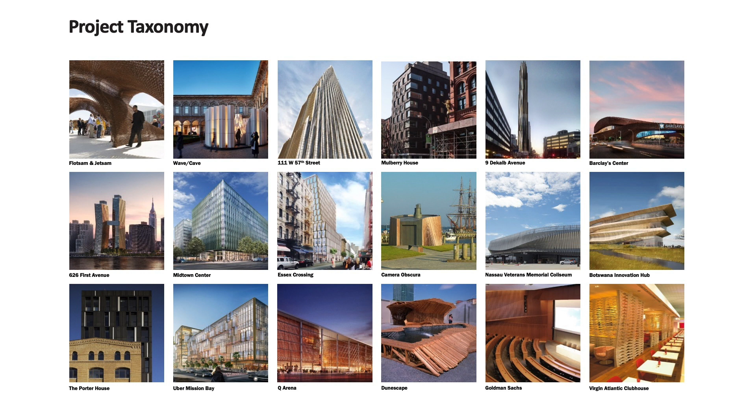But this is a process presentation. If you look closely at all of our buildings, there is an embedded R&D element in terms of material, in terms of delivery. And really, the firm itself is very much about understanding complexity, the design complexity, and the delivery of that, what it means to take elements and pieces and components and describe that to the parties involved in the manufacturing or delivery of the building.

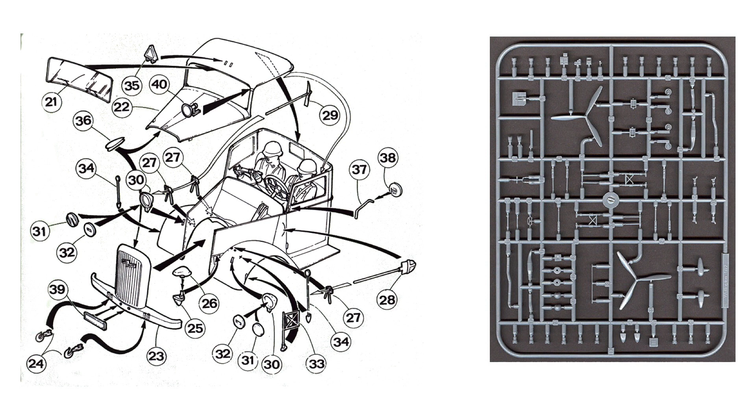And just as you would build models growing up, you never read any instructions. That's the sort of IKEA approach. Piece 32 snaps into piece 31. And industrial design certainly works at the idea of a piece and a part and a sub-assembly, and automotive and aerospace, of course. We do believe that you can manufacture buildings. Great design, great environments, but they can be delivered through a manufactured approach.

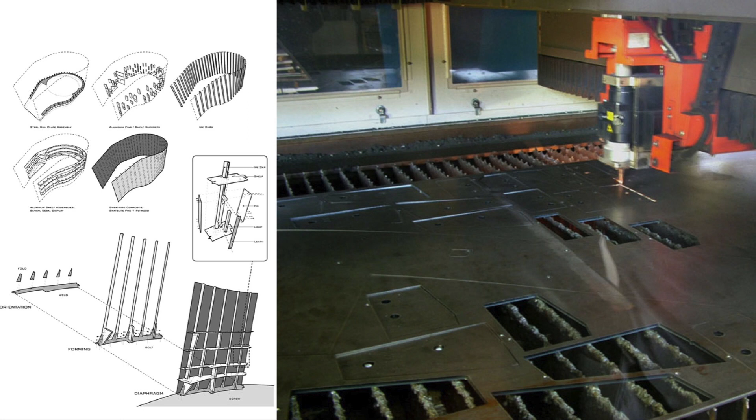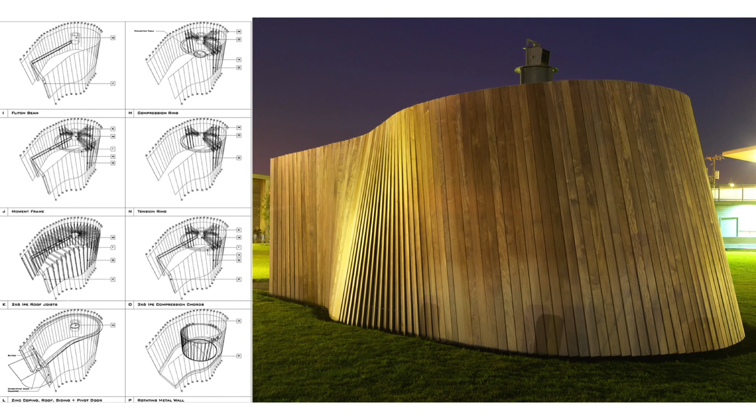What it requires is an intimate understanding of, of course, your design and delivery, the machines and methods, the people you're communicating with. But when you synthesize all of that and design that in parallel, the modes of communication change. The plan, section, elevation are not the most communicative and effective way to deliver.

That was a very old project, camera obscura. As we've moved through, we continue to develop methods of communication, whether it's virtual reality, augmented reality, but this model-based approach that the truth really is in the design environment. It's a three-dimensional environment. And we like to know the pieces and parts in our buildings, whether we're involved in fabrication or not.

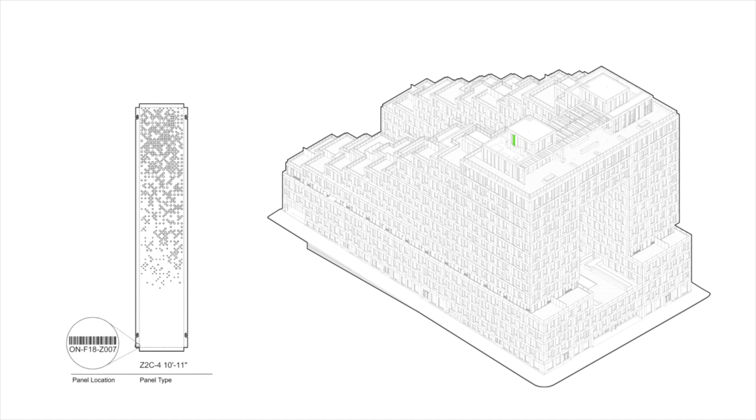When we say that there are 75 different panel types, we mean they're 75. They're not stretched, they're not mirrored, and there is a nomenclature. We don't know what the manufacturer will call an individual piece, but it is important to understand that they will call it something, and if we build those systems in the design process, we can streamline the translation into manufacturing. We have found that to exercise the way we want to, we have had to move out of the AEC toolkit. We've had to expand into software and platforms that are not the traditional architectural design realm.

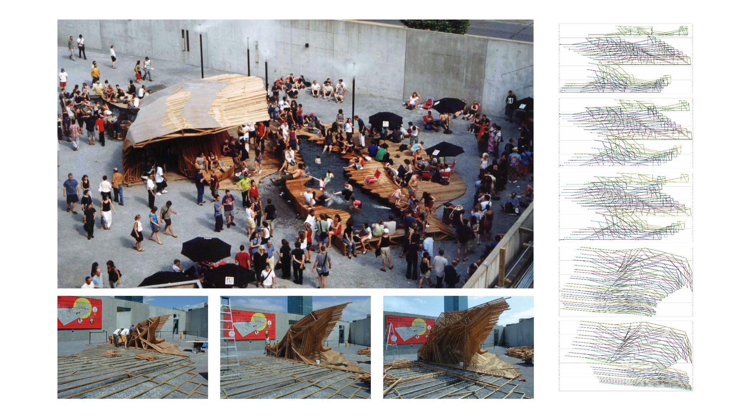So we do leverage aerospace software, and really, this DNA came from the first project, PS1 Pavilion. This is when computers were hitting design studio, and it was very much about making form. The SHoP approach was that computers are a tool for delivery. The only drawing, construction document, is a one-to-one plotter scale. All of the profiles plotted at one-to-one and nailed in sections and then erected one slice at a time. That's the only tool needed.

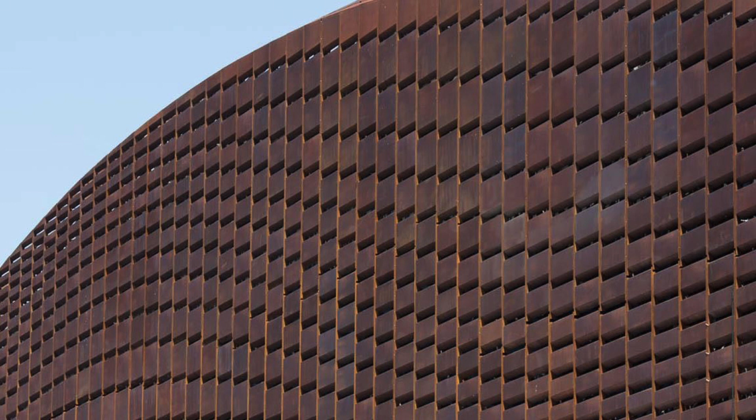And a decade later, if you take that mentality, our process and tools become exponentially more sophisticated, and we're able to handle orders of magnitude more complex delivery mechanisms. So the Barclays Center is our largest proof of concept at prototype scale, where every piece and part is modeled. All the manufacturing deliverables are embedded in templates. There are 950 different mega panels. This is a prefab system. It's built off-site, manufactured off-site, installed in the building.

But the design criteria, the model itself, contains all the information, and every design iteration contained all the unrolled panels, which, as the systems develop, as we get information from engineering and from manufacturers, we're able to address long lead items. How do you order 600 tons of steel while you're in a design process? You have to control all the variables and synthesize design and manufacturing.

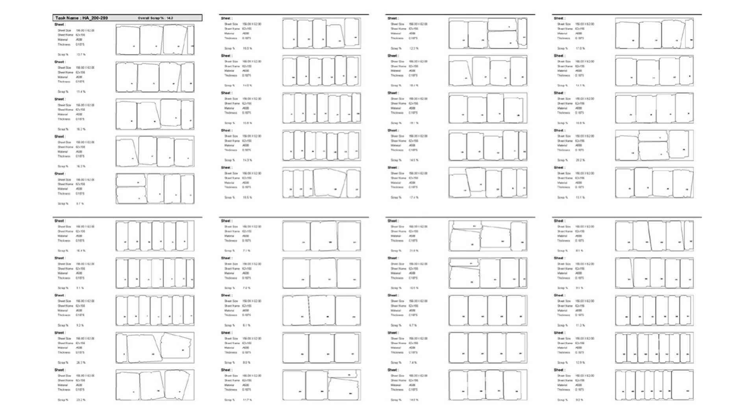And to the point, we're able to automate a lot of the fabrication tickets, but the idea of a templated approach, which you'll see in a minute, is that you divert or reappropriate energy in building smart systems up front that can be applied instead of having armies of CAD and drafts people.

And the takeaway from that is that it's not about geometry. We can solve the geometry and the CNC and all of that. The challenge becomes logistics. How do you keep track of hundreds of thousands of unique parts? Because the machine doesn't care whether it cuts 12,000 individual parts or the same part, but you have to track them.

So we have our database, and what we realized was low-hanging fruit is we can host a model online. Everyone can log in, and we created that iPhone interface so that you can scan along the factory floor, update, and the process is visualized in real time. There's not monthly reports or weekly reports.

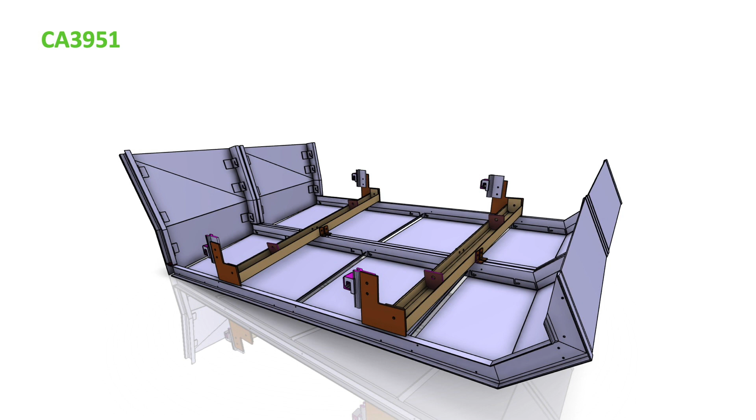Yeah, I mean, Barclays certainly, as a prefab exercise, was in very many ways an experiment. We did not go into that with a defined scope of how it would be delivered, but it was facilitated through these digital tools. And if you look at one individual unit of the 950 different ones, we did it on a traditional file-based program.

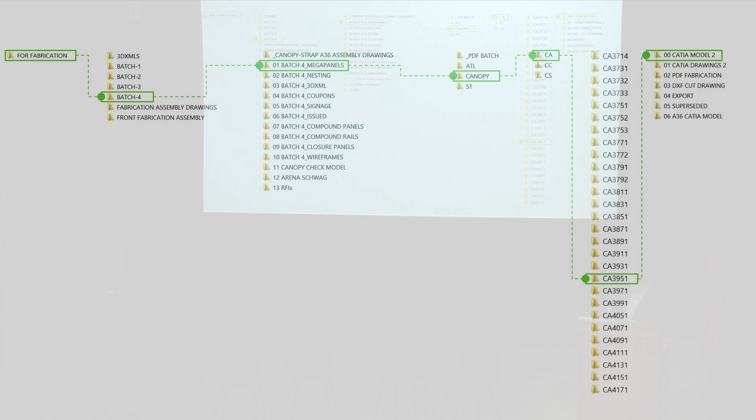So we're modeling, and you have to keep track. If a piece and part, you have to trace it through your Windows Explorer structure. If you need information on something, you have to have this very logical ordering system. We've since moved to a cloud-based platform where the information is accessible. Everything that has to do with that unit is available instantly, is retrievable immediately, and this access to information is exponentially faster, which leads to decision making, right?

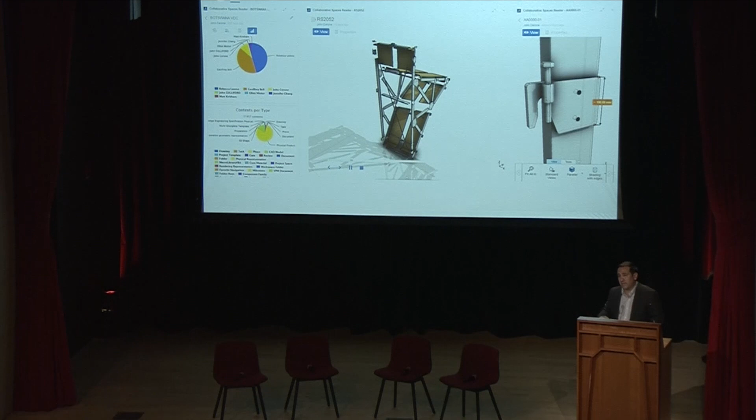The information itself is not limited now to heavy software platforms. It's all in the cloud. So instant access to the data and metrics, how many pieces, parts, who's made them, web viewers, so that we can work overseas in federation with our collaborators. The project itself actually is the modeling environment, and that is a unique shift. It was quite profound to us when we realized that we're not thinking of a project as a building. We have a portfolio of projects in a platform.

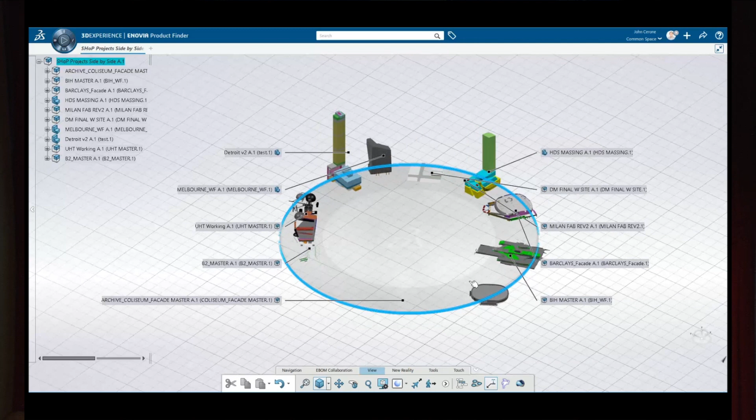Pieces and parts can start to relate to each other across, to the building scale, to the individual bar of a building, to the block, to the trade, to the facade components, down to the individual unitized system, down to the bespoke bracket and piece and part. This ability to move seamlessly through all the scales of the building in real time had a profound impact on how we understand our design process.

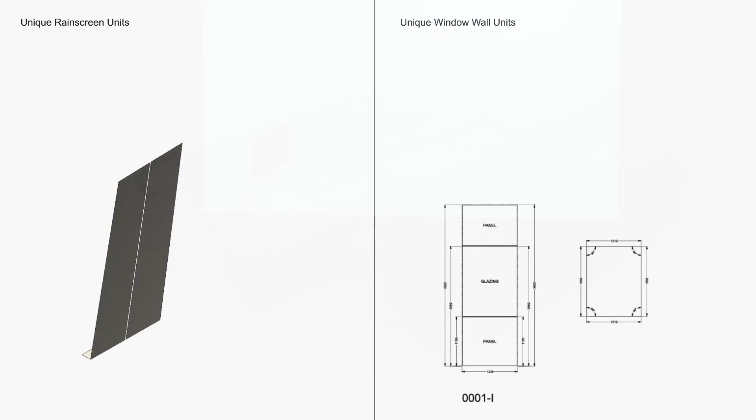So Botswana Innovation Hub is something that's near completion, and in many ways it's an order of magnitude more complex, an evolution from Barclays, in the sense that we know where to start. You have to analyze it. We need to know how many different pieces, parts, right? So you automate the analysis of your design, and then it's very much the idea of a skeleton model. Parametric modeling is not a novel thing anymore in design schools. So it's the idea of these lightweight frameworks, but that we can then use those to host complex geometry.

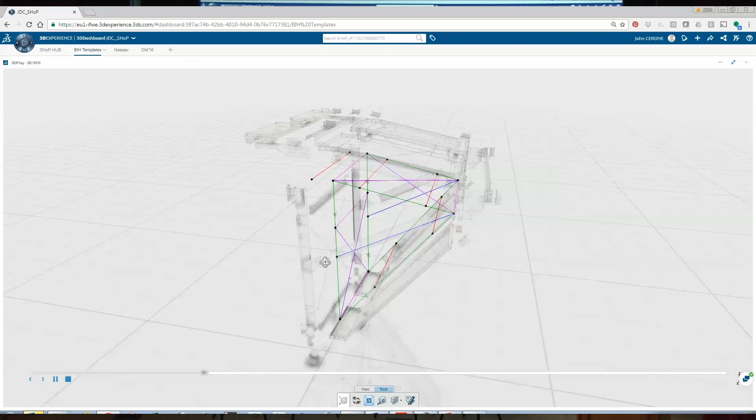That is where the paradigm starts to shift, where you build these 8 templates that account for probably 520 different units. So they're all bespoke units, but you're building the template up front. It's a very simple wireframe, and as you get information from engineering, from the manufacturers, constraints on materiality, you host parametric systems on those pieces, parts, and you instantiate those unique templates.

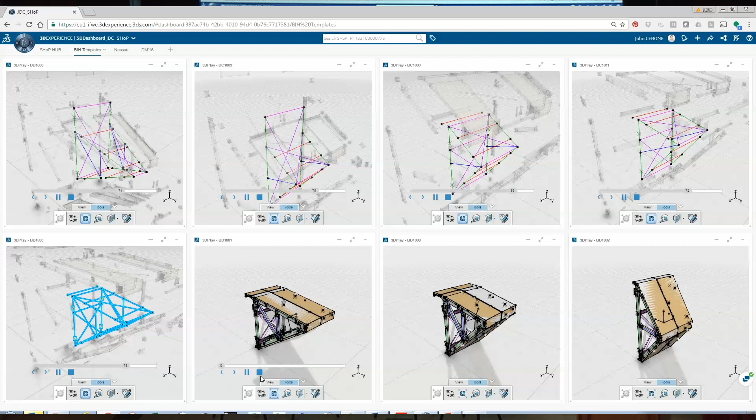So you spend a lot of time up front building a template that has all of the information, all the fabrication deliverables, everything needed to produce it, and then you automate the production of thousands of units. And of course, our systems for tracking, online databasing, we've built our own tools in-house to facilitate that.

And this is the information we received from the engineers in Cape Town, South Africa. We asked how far can a member span before you need another connection. And this is not a dig at them. We don't need it on a title block. We don't need line weights. We need to know that it's 2,200 millimeters until the next strut. And from that, this is the only drawing deliverable we gave.

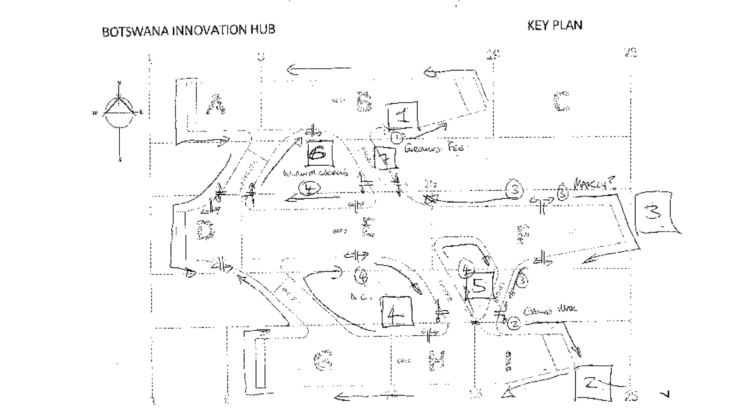So there's 3,000 units. 1,600 of them are unique, and the only drawing for each one is an IKEA assembly drawing with a bill of materials. Likewise, in what order should we deliver these to you? They sent us this drawing. It's 1, start here, go that way. 2, then we'll move here and we'll go this way. It is the only information we need.

We have the CAD, we have the modeling software in terms of schedule performance, and we can simulate quickly with them the iterations of, well, what if we put 2 crews on this? So this idea of creating unnecessary deliverables, that's not good. Of course, 99% of the work we're doing is from our seats in New York, and so we digitize the building, and we don't release anything for fabrication until it's been vetted digitally.

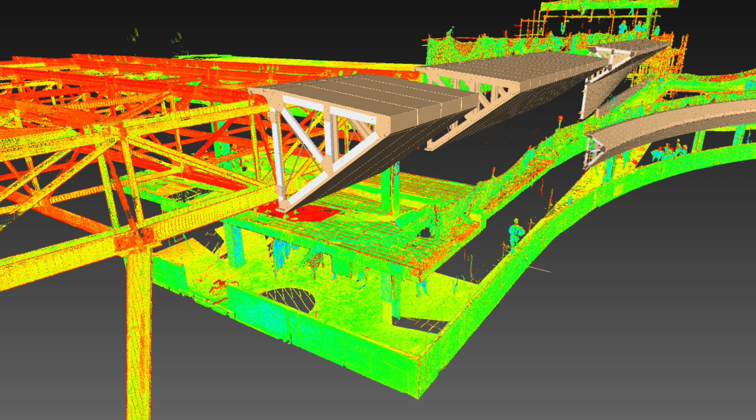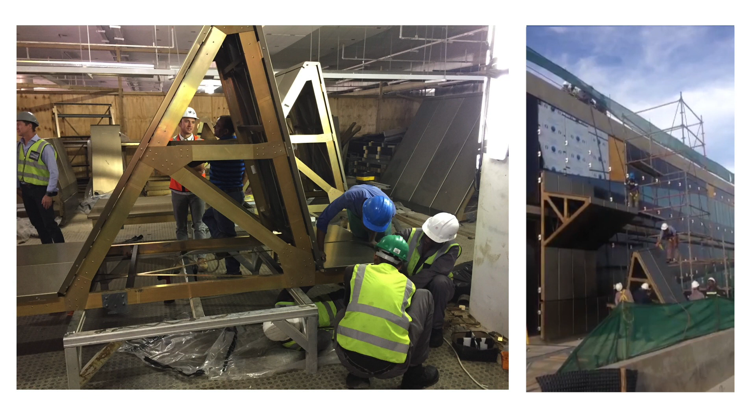And it's very much this. The pieces and parts get fabricated in Cape Town, South Africa, packaged up in IKEA kits, essentially, shipped to Botswana and assembled in the parking garage and installed on the building. We know exactly the methods that they're going to use. We know there's not a crane. We know the weight. We know what's reasonable for people to manipulate. And again, all of that was built into the design systems.

And yeah, it's near completion, and this was done with obviously very low skill labor, but very precise systems, self-jigging. And just quickly, in terms of material practice, we hadn't done a pavilion in 20 years. We hadn't done one since PS1, and it took a decade for that to sort of manifest into Barclays. And in 2016, we did 2 pavilions. We did one in carbon fiber reinforced plastic, ABS, and 3D printed bamboo.

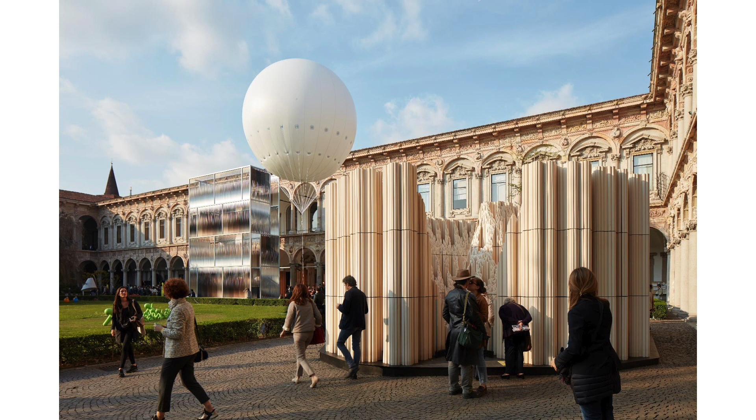So this is an exercise in autonomous form creation. How few parts can you have? It's dictated by the truck bed, how heavy a piece is to pick and lift. So that's sort of advanced material looking, and then we did the most traditional material, or one of the most, terracotta. So what can you do with terracotta? You can control the profile, and then you can cut it.

So these experiments, again, become logistics exercises. How quickly can we set up a system with collaborators that we have great relationships with, understand the tools they're going to use, and execute? Both of these pavilions happened from design to delivery within 3 months. And in this case, a very traditional fabrication deliverable. This is exactly how the people on their shop floor use the miter saw.

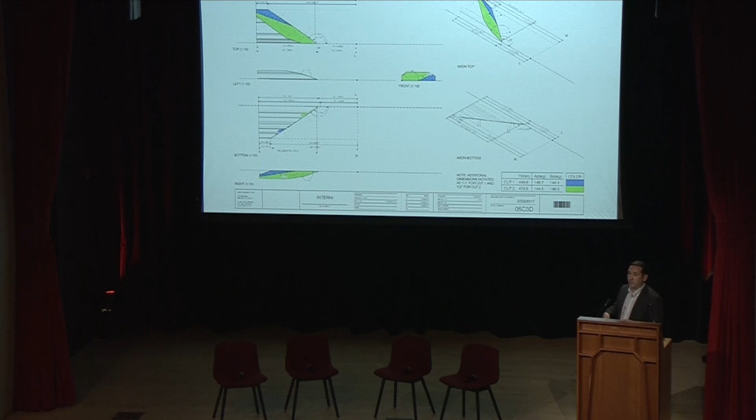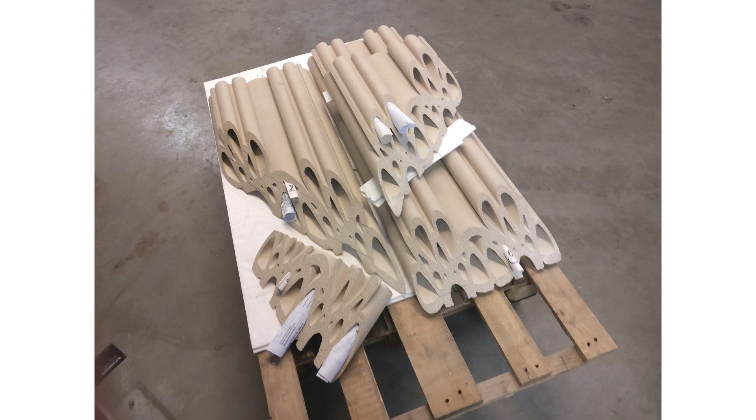These are the cuts they want, so we automate the production of thousands of tiles. This is sort of high tech meets very low tech. And it's kind of this beautiful relationship where the deliverable is tailored exactly to the people or machines making it, and assembled in a week.

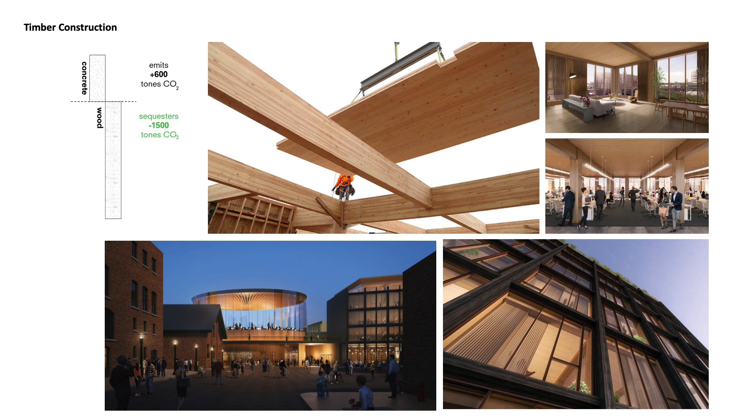And so the reason we do these experiments, we hope it's not another decade. We're already seeing exponential gains in these production technologies. But how do we apply this? How do we manufacture buildings? How do we move this at scale? And of course, CLT timber is a material that we love. We keep going for it. We're finally doing some buildings in it. We had to move out of New York a little bit to do that.

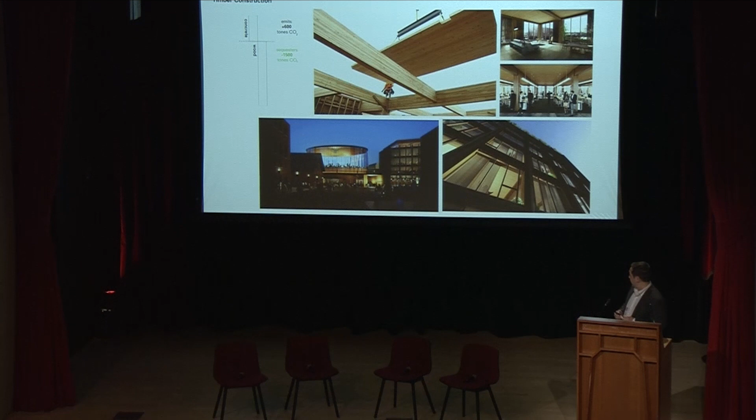But this idea as a manufactured good, besides all of this, obviously, environmental and warmth, it's a beautiful material. It feels great. It's healthy, but it's really a machined good, and it's a material that we know we can move our design models directly into manufacturing. So CLT for sure, and then of course modular construction is of particular interest to us.

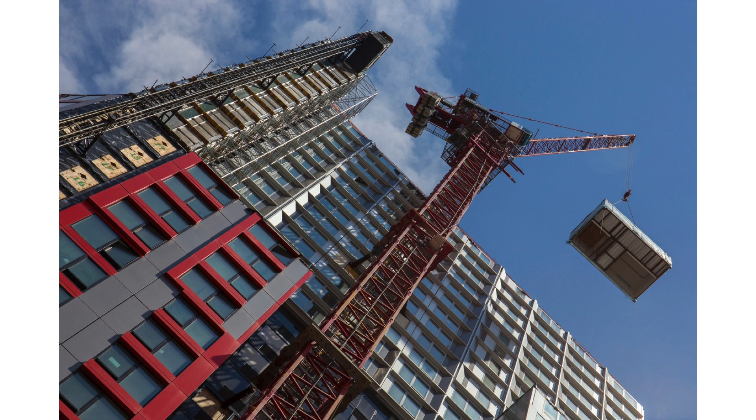It's been a while, but we did the 32-story, we call it B2, Building 2, 461 Dean Street tower in Brooklyn next to Barclays Center. And in many ways, this is a project where it starts with all of the don'ts in modular, which is there should be repetition, don't change the chassis types, try to keep it as regular as possible.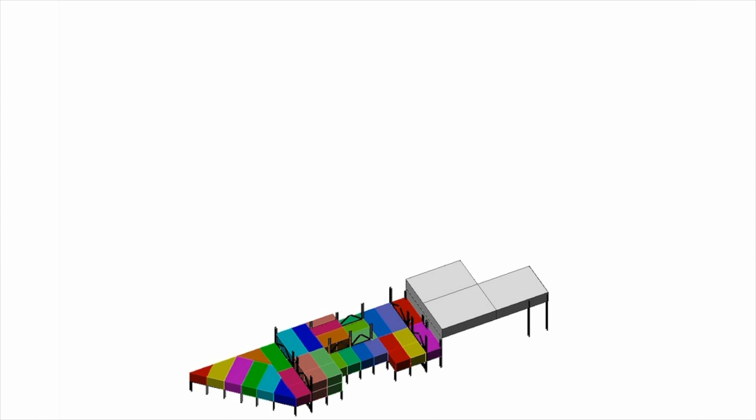So we built the chassis, a fully finished mod with the facade installed. There are, I think, 950 units, chassis in it. I think 350 of them were different, so that is a huge no-no in the world of modular. But, and I'm sure there'll be some questions or follow-up afterwards on any issues with the project, in so many technical ways it's an incredible success that we can't ignore.

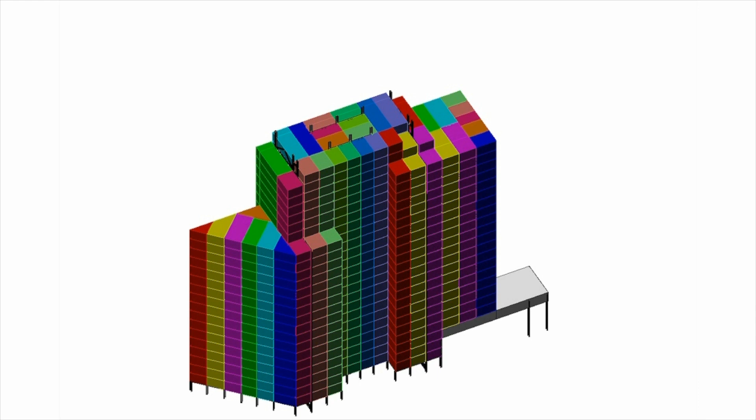The complexity, and in many ways, to start with a building block this challenging has sort of reaffirmed to us that this off-site prefab manufactured approach can deliver incredibly high quality, great affordable architecture, and it is about process and understanding process, and if you can control that and you understand the future ways of building, this is an incredibly promising move towards the future of construction and design.

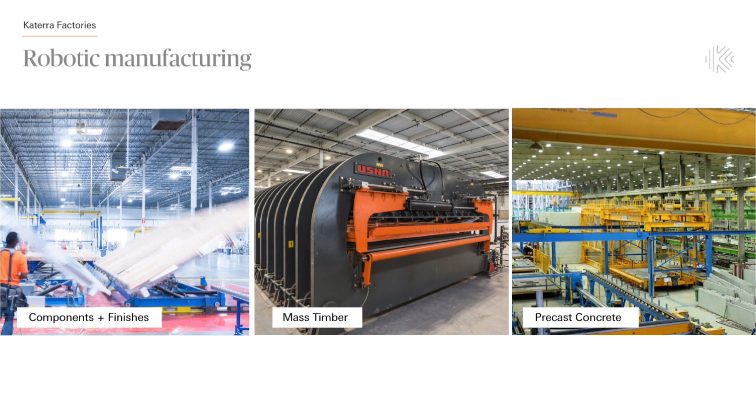So the photograph on the left is where we have a component factory with walls and floor trusses, doors, countertops, windows, things like that. We have two other factories like that, but much more optimized and more automated, that are coming online, one in Texas and one in Tracy, California. And the Tracy, California factory should open in a couple of months. It's about 600,000 square feet, so over twice the size of Phoenix. Texas will be about the same, and then we'll slowly move to the east.

In the middle photograph, you see the press. It's a 12-foot by 60-foot press for our CLT factory in Spokane Valley, and we're just starting to push wood through that factory. In fact, just this week, which is pretty exciting. So our first panels will come out of that press and into our first building in July of this year.

And then precast. It's interesting, through an acquisition in India, kind of an opportunistic acquisition, we ended up in the precast business. And this is the way things are built throughout India and throughout much of Asia. And what's been really surprising is how good they are at precast. I mean, more sophisticated than just about anything you see across America. You have to go to Central Europe and Northern Europe to see facilities that are as advanced as they have in India, of all places.

So it was really surprising that we were able to find a company like that there. They're at the top of their game, and so now we're really building a lot of projects in India and plan to take some of that technology and bring it to the U.S.

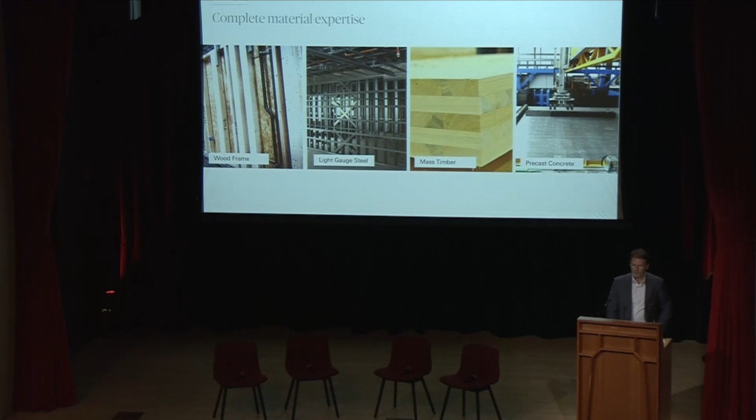So in the multifamily sector, what we're doing also is applying the rules and lessons learned from other industries, for example, the automobile industry. So if you're picking out a variety of packages, interior packages or features in a car as you're shopping for a car, you know for sure that when that car is delivered to you it's going to look great, because every option has been dialed in by the automobile company, and they know that whatever you pick, they can stand behind it. And that just doesn't happen in architecture.

So what we're trying to do is narrow our supply chain to a point where we only have a catalog of materials that we embrace, that have passed the test for sustainability and passed the test for beauty. Then that becomes our catalog, and no matter what combination a client or customer is looking for, we'll be able to assemble that and provide a really high quality product in the end. And if there are some products where we can't find exactly what we're looking for at the right price, then we will design those ourselves.

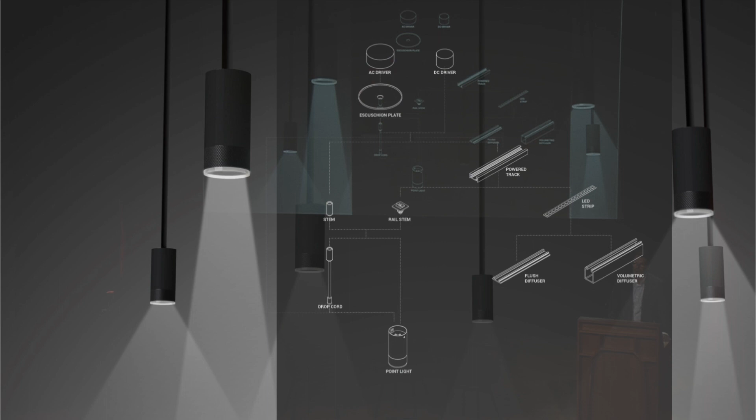So we're designing our own set of plumbing fixtures. We've got an appliance line coming out, light fixtures, door hardware, anything that you really come in contact with as a customer. We want to completely control the aesthetic of that and build all of those systems around the same idea of this kit of parts. So very few parts assembled in different ways to create beautiful architecture.

The result is we want to be able to provide workforce housing. It's that 80 to 120% AMI workforce housing that is largely ignored by the AEC industry, and we want to provide a super high quality product at or below the market costs.

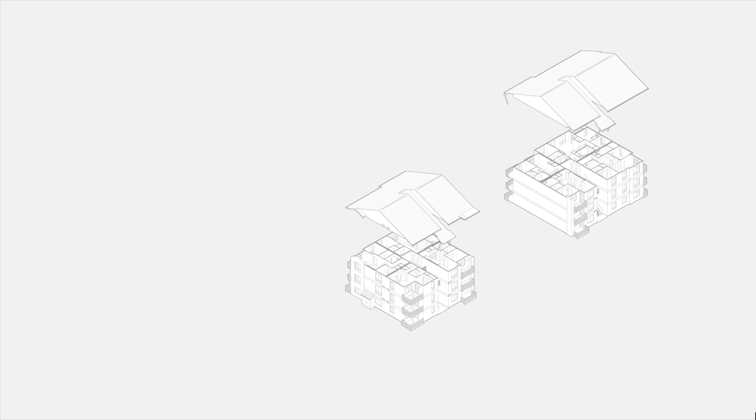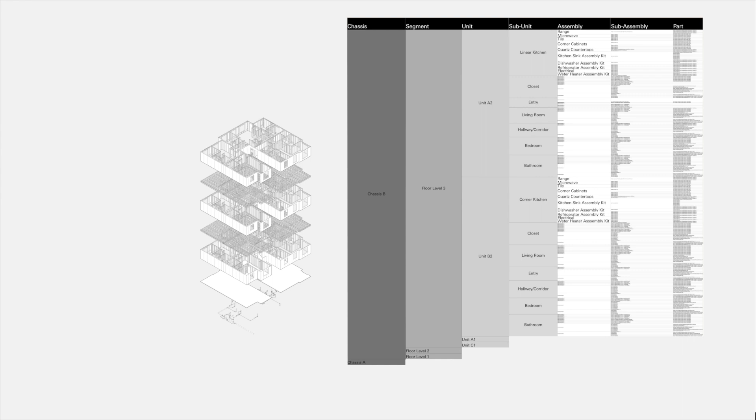So these are some images of some of our market rate housing. And in order to do this in a way that is repeatable but still provides enough variety, this is a little kind of a dumb animation, but just to prove a point of a simple 3-story garden walk-up apartment building. So 15 million people across America live in this type of building, this 3-story walk-up. And again, it's one of these building types that's been woefully neglected by the AEC industry. You don't see a lot of great architecture out there, and we want to change that.

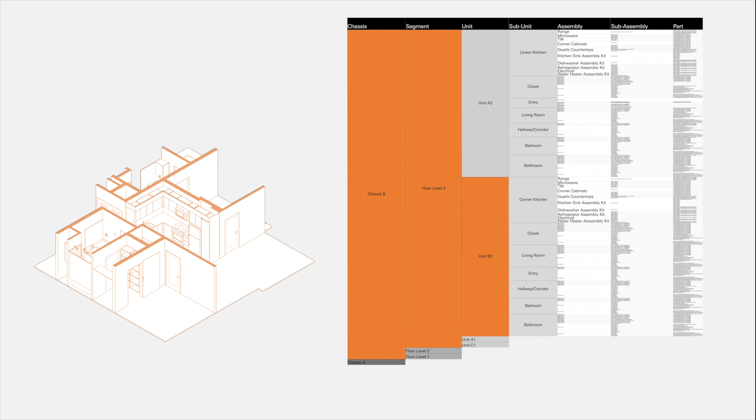But to do it and to have it repeatable, what you saw was 4 chassis that we have available. You can combine those in different ways. You can have different roofs to put on. But when you break it down inside the unit, those kitchens and those baths are exactly the same from one unit to another. And we're detailing that all the way down to the bill of materials, just as John was explaining in more of a bespoke project. We're doing that in a way that can then go into our catalog and become a repeatable product to use over and over again.

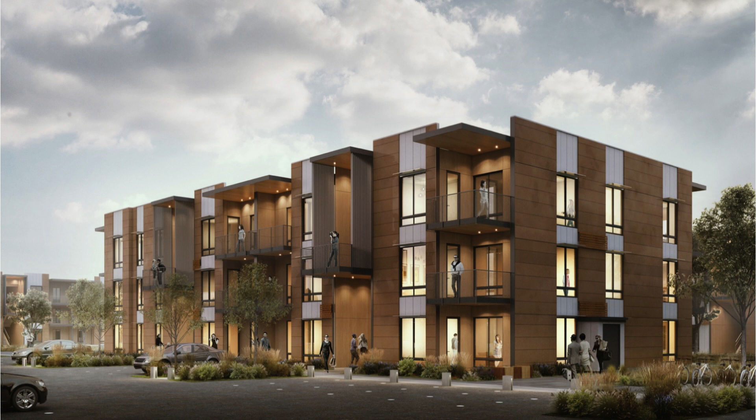What's interesting is you take these 4 chassis, and those are completely dialed to a bill of materials ready to go to the factory floor, but you can skin those in a way that if it's in the Pacific Northwest, you might have an architecture that looks one way, or in the desert Southwest, it would look different. But 90% of those buildings are exactly the same. And then you have a variety of finishes available on the inside. And as we develop this kit of parts, we can then modify that over time in order to look at shifting of blocks and different stories from 1, 2, 3, or 4 stories and so on.

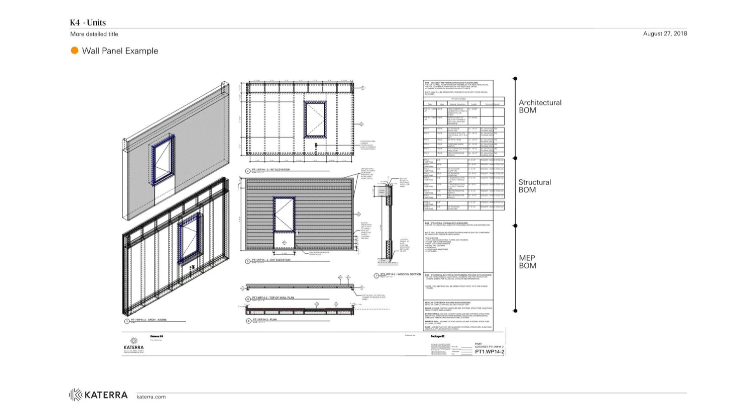This product is the one that I'm most excited about. This is our workforce housing product, and it'll roll out of our factory 3rd quarter of this year. And this is that 80 to 120% AMI target we're looking for. So workforce housing, virtually anywhere in the country with no subsidy, that's our target. And that's one of the main reasons I'm at Katerra. To do that, we're dialing, again, every panel down to the bare minimum that's required. We have 4 different structural tiers and a wide range of environmental tiers across the country, and it's taken down to a bill of materials.

And then I'll end with just a little bit on mass timber, another one of my personal passions and something that I'm really excited about, our investment in Katerra. So we're building a plant right now in Spokane Valley. This is a Michael Green project. Michael Green is now part of Katerra. And we're trying to build a kit of parts around mass timber that's designed specifically for our factory.

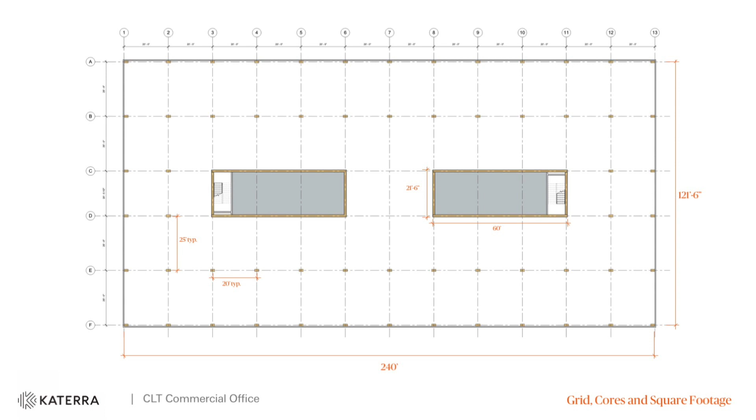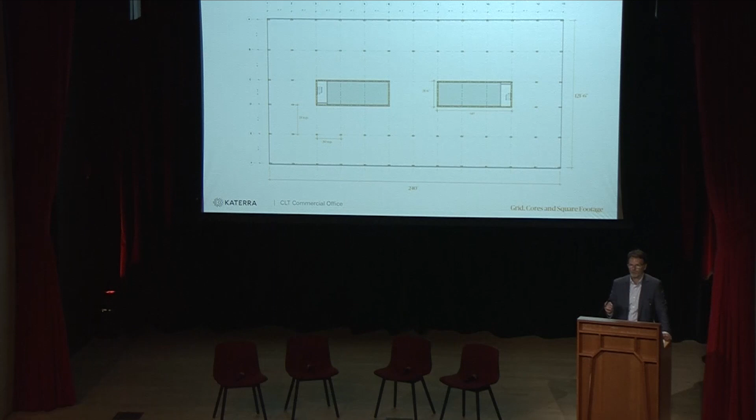So instead of just taking a bespoke project from anyone and trying to fit someone else's geometry to build panels for that, we're looking at how can we build a building system, say for commercial office, that is completely built around our 12-foot by 60-foot press, so that every time we use that press with 2 5-layer panels for floors in it, we're using every square inch of fiber. And that's how we're going to drive the cost of the product down, and that's how we're going to go head-to-head with concrete and steel and be able to put this material across the country, which is super exciting to me. So we're well underway in developing this product.

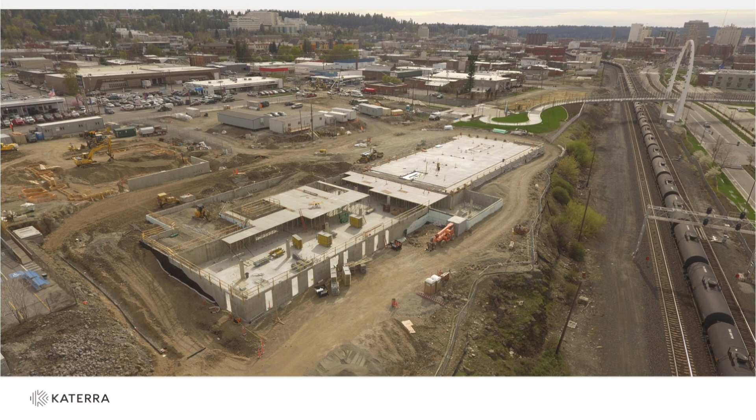These are some studies that we have right now underway. This is actually a building that we designed with Michael Green, using a lot of that same system that we're talking about. So in parallel, we're working on projects and product. That building is under construction right now in Spokane. The first panels out of our factory are going to be going to that.

So I'll close with just a couple of thoughts. A couple of the reasons why Katerra was formed.

One is just this industry that we're all part of, since World War II, has the lowest increase in productivity of any market sector or any industry across the world, even lower than mining, which is really embarrassing as an architect to have to say that. It's been dead flat since World War II. So it's time for us to do something about productivity.

Second thing is opportunity. There's no one in this market that has any kind of market share. Compare that to any other industry in the world, and it's kind of phenomenal. So there's great opportunity in both of those cases. For me personally, the ability or opportunity to think about changing the paradigm for workforce housing in America is something that's super exciting to me, even if it requires like a repeatable product.

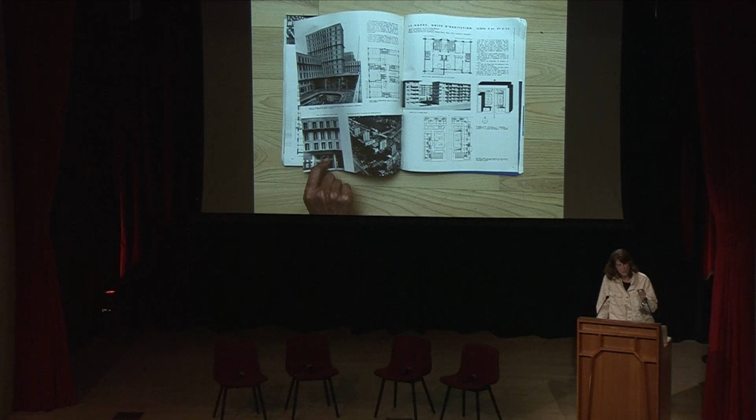Because we know that those modern principles of centralization and assembly line production and precision did not resolve the housing crisis, certainly in the world and not in the United States, but it did contribute to a lot of carbon emissions, and it did really participate substantially in creating the kind of climate change crisis that we find ourselves in now.

So the first project I want to talk about is called the Soft House. It's a project in Hamburg, Germany. It was done as a co-development in competition with Patrizia, who's a very large German real estate developer, my company, and the IBA program. So this is a federally sponsored program which has a long history in Germany, dating to the 1920s, where architects compete in a competition, and the prize is actually winning your project and being forced to build it.

So this particular IBA that I was involved with had a challenge, which was to look again at sustainable construction and to really think about how sustainable living could be branded and could be made more desirable. So we did a couple of things on this project.

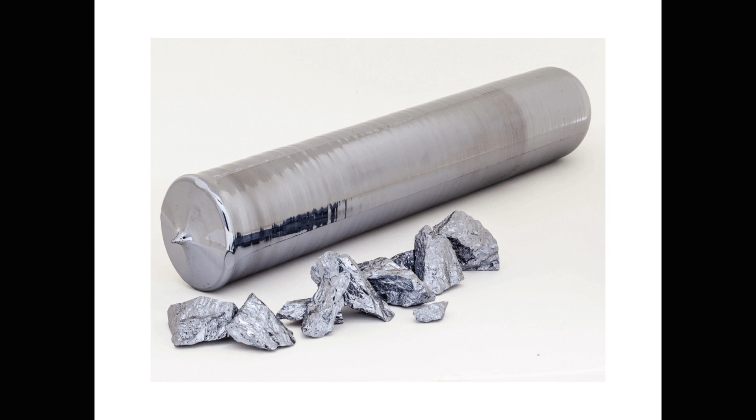The first thing that we did is we really tried to think much more about embodied energy and not operational energy, and all of housing is geared today towards operational energy, which is the energy that when you walk in the front door of your house and you open that door, that's when the lights turn on, that's when your electricity meter starts whirling, and that's your operational energy.

But if we think about embodied energy, it's really all of the material that goes into transport, extraction of materials, bringing it into your place of production, getting it out of your place of production, and also what happens at the end of life.

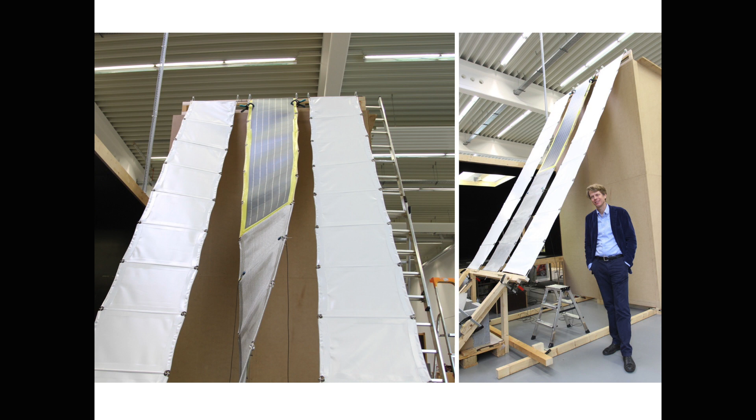So this was a project where we wanted to produce energy in this house. So instead of using silicon, ingots of silicon, we went to a flexible photovoltaic system that was dynamic, working with our partner on this project, Jan Knippers, from Knippers Helbig Advanced Engineering. So Jan developed this system of flexible photovoltaics that could twist.

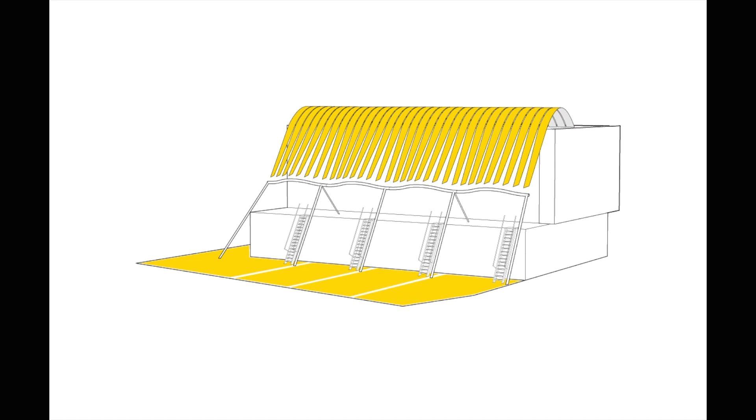And the Soft House is really kind of super dumb. It's a podium that's work-live, so we're sort of changing and expanding the program of architecture so that you can kind of work there, or you could rent the lower podium as a kind of a for-rent element into your house. And then we're using those photovoltaic strips, a little bit like sunflowers, to kind of begin to turn from the east to the west.

And when we do that, we render those materials much more efficient. And since they're roll-to-roll, actually much like Flextronics, you don't have the high carbon footprint that you would have with a silicon-based polycrystalline or amorphous silicon solar system. So this is a Soft House.

Long story short, we designed it and fabricated it in just a little bit over a year with 3 new innovations: the twisters that you just saw, the chassis itself, which is a particular kind of solid wood construction, and then the lighting system within, which is an ambient LED system.

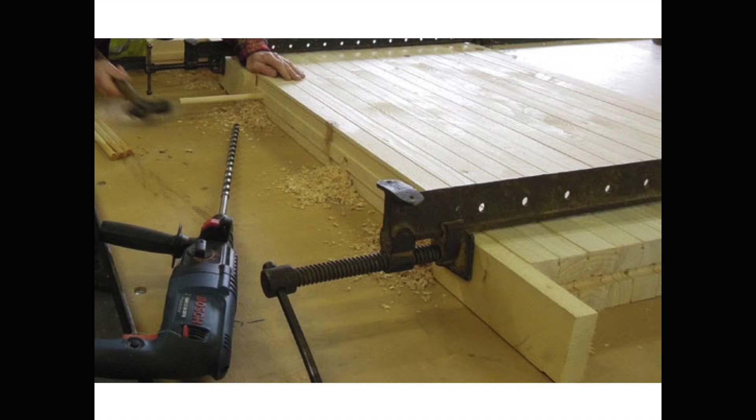We used actually a solid wood construction too, but for many reasons that we can go into later, we didn't want to go centralized. And if I were to rethink that, I would probably advocate for a hybrid local and centralized skill set and kind of microeconomy.

But we used a very ancient German tradition of Brettstapel, which is a completely solid wood construction. You can see here it's fastened by hardwood dowels into fast-growing softwood. No hardware, no glue, nothing. So it comes apart very cleanly at end of life.

We worked with Marc Holzbau, a small company, really a carpenter company. This is a skill set that's all around Hamburg in that area. And these are the 4 units. They were driven a short distance to the site, popped up.

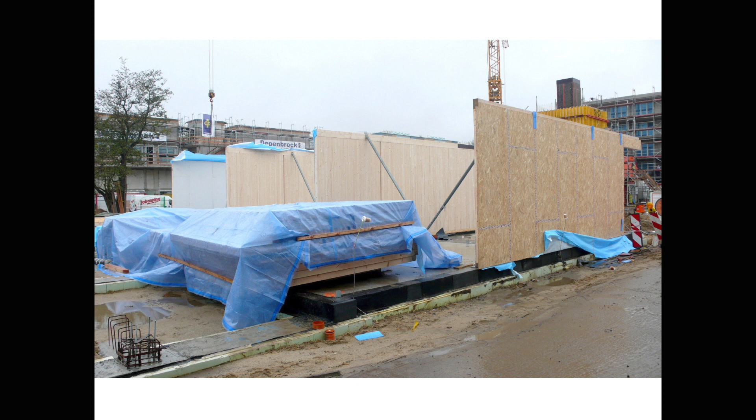We used a Serge Ferrari weather sheet vapor barrier, which you can see here in blue. We used sheep wool, and then we used a kind of larch exterior cladding, which is pretty typical in that region.

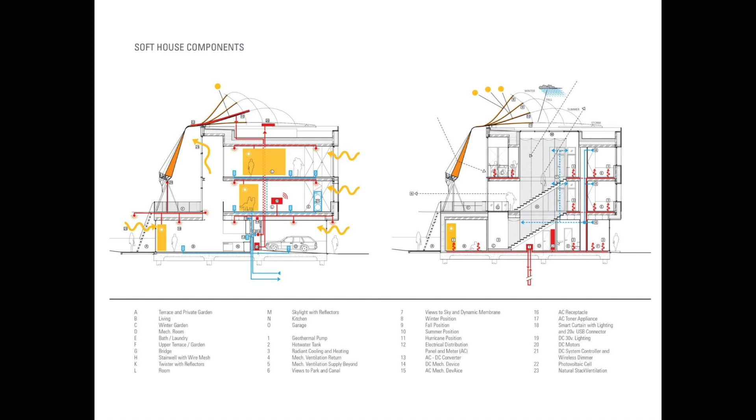So the twisters tighten up in case of storm. They become even more taut, and they provide power for a lot of things. They provide power for the ambient lighting, for some pumps that we have in a radiant heating and cooling system, and for a last mile solution, for an e-car.

And so I want to go inside the house for a minute and say that in order to realize this, we had to really reconceive of the interior of the house. We had to strip it bare. We had to really imagine a very different aesthetic that was almost 100% wood, and then just this one curtain, which became an important actor and animator of the space, a curtain which contained the ambient lighting that you could move back and forth.

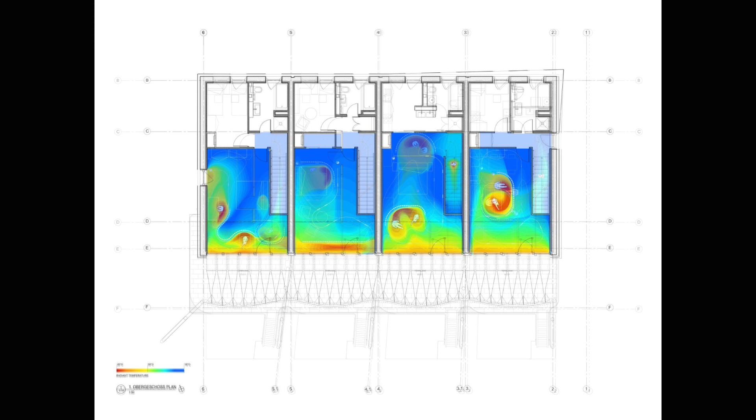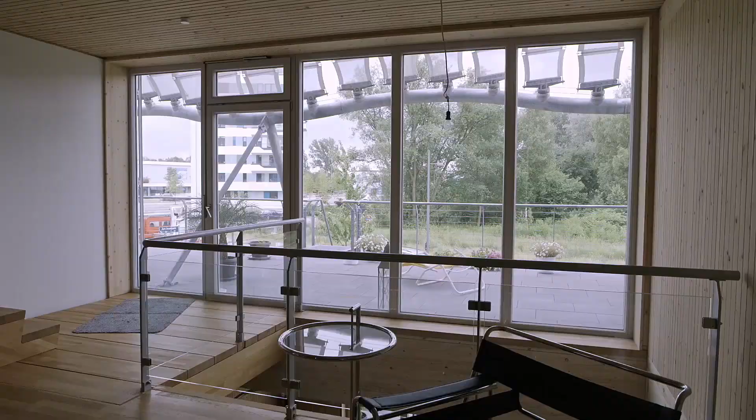The units are all sold, they're all occupied, but of course, we don't know these owners. We don't know them personally because this house is a real estate development. It's for spec. But you can see the way in which these people are using the curtains and how they move from more conventional room dividers, everything that you would expect a curtain to do, to beginning to contain this ambient light and moving from a flat window to a more figural condition.

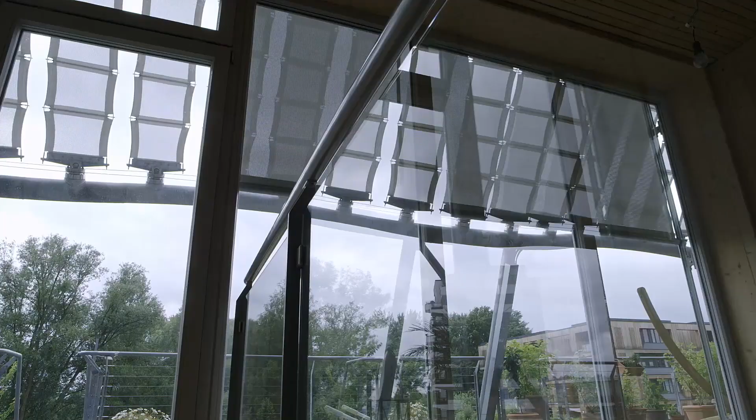So just the point I would make on this project is we tried, through the aegis of IBA and the Federal Republic of Germany, to produce this zone of skill set around a certain pocket of forestry in the north of Germany.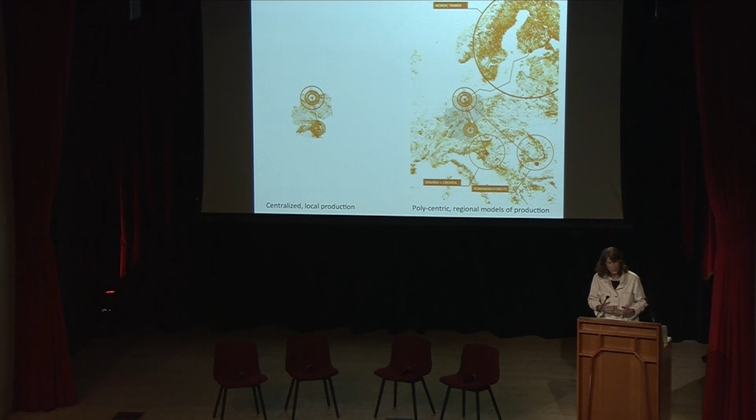There's also another one that we also related to, but we were quite nationalistic, and I think if we were going to do it again, I would look at something like short sea shipping with a fabrication facility like that of the former Finnforest for plywood. And you would begin to look at how the biodiversity of where timber is could produce a different kind of culture of construction that would be transnational in Europe and would introduce a kind of trade zones that are not necessarily nationalistic but have more to do with the biodiversity and types of wood that are available.

If the soft house was kind of a hybrid of high tech and low tech with the new technologies and the active version of the passive house, the Chrysanthemum Building is extremely dumb and extremely low tech, but I do think it's a kind of a viable potential strategy.

I love this advertisement. It's from the Sackett Company, and it's showing a person drywalling a wood stud wall. And the idea was that U.S. Gypsum in the day wanted to incorporate the wall, wanted to take over all the materials and make a kind of single vertically integrated wall that they could sell. And I think that the wood stud, the dumb wood stud, stick-based construction that often is vilified still may have a role in the decarbonization of architecture.

And that role might have to do with these really funky sites that exist in cities, because so much of our cities are already built, and we have these very odd geometries and these very odd infill conditions. And actually, if you leverage the workability of stick construction and the fact that it's not repeated, and then combine it with some panels that are repeated, I think you can do some pretty interesting things.

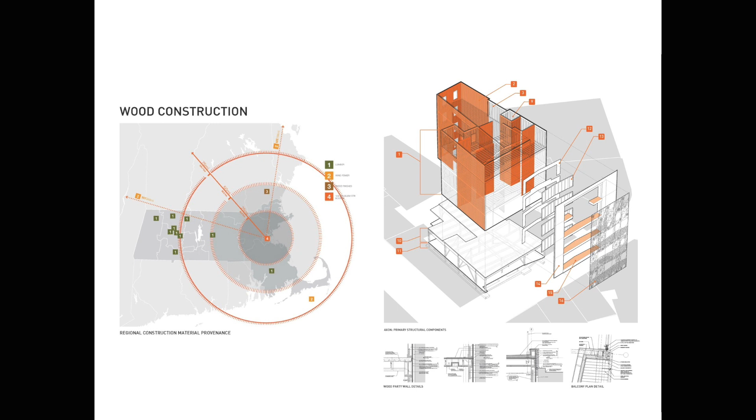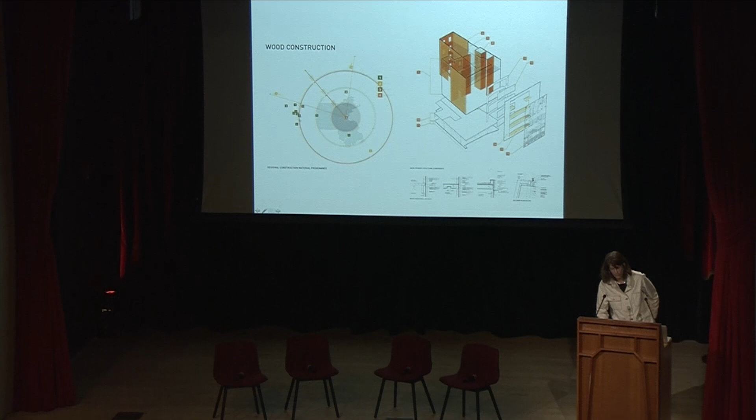So the first way that we transformed the wood stud was to actually resource it, right? We changed the sourcing location and got that from some small pockets of forestry in Massachusetts that was brought into Boston. And then the second thing we did was create some new technical details that allowed us to take things like the elevator shaft, party wall condition, and so forth, and make that all out of wood. And we got that passed by the inspector.

So the city produces this kind of funky geometry, and we try to leverage that to take advantage of the flexibility and workability that the 2x4s have. All the waste goes to Re-Energy, which is actually right next door to our office, KVA, and they make wood pellets for stoves up in Maine, so it's kind of a full cycle economy.

And I'll show you this in a minute, but we use the smaller spaces up front for a bunch of micro units, quite small, and then we have what we call an adaptable family loft in the back, which I'll show you in a minute. So it's a very impacted urban condition, Chrysanthemum Building. This is the render, if you will. This is what the building is like now. It has a lot of pressure, being in a very old, fabric-y kind of part of Boston.

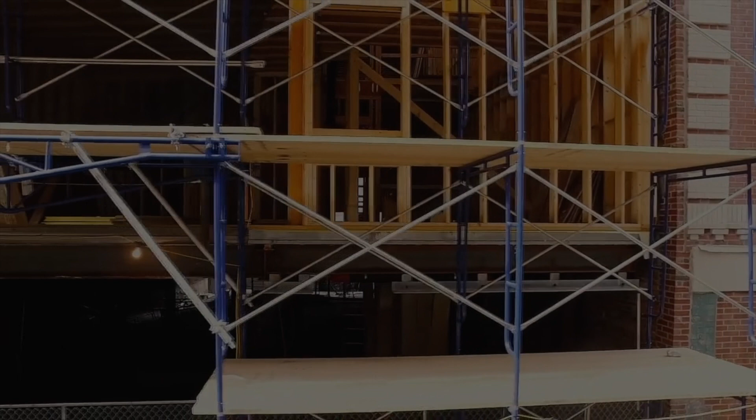And this actually was market rate housing. We were able to build this for a very, very reasonable fee, which we can discuss in the questions and answers. But you're going to see here that there's still a steel podium because this is a mixed-use commercial. So we're still accepting that steel because we need that as a fire stop. But all the floors above, all that's wood construction. You'll see the guys carrying some plywood there. And looking right back in, you're looking through the micro units through to the adaptable family lofts.

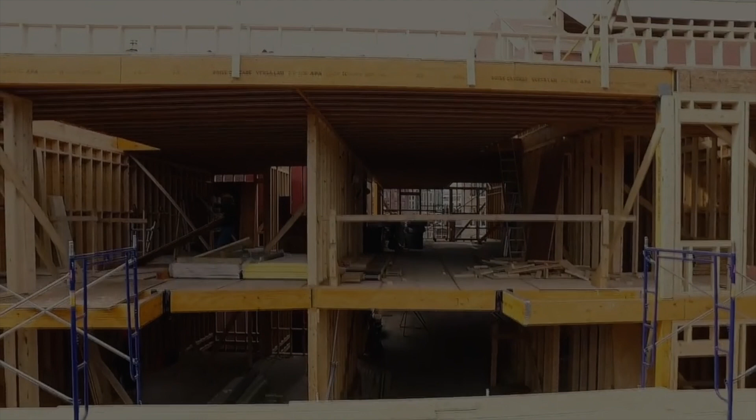So what's kind of interesting about this is, let me go back one, is that we are able to think about core and shell in this balloon frame construction. So it's a very dumb construction, but what you see there in orange is kind of like a deliberate churn strategy that's made all out of forest certified wood, so that you can set up your unit and enjoy it for 10 years, and then you can take that plywood out and recycle it and put in a new interior. So we have a lot of storage, we have composting, we have a lot of services in this.

And in the larger adaptable loft units, we just do something very dumb, which is to say, why have different unit plans when one unit plan can be adapted over time, right?

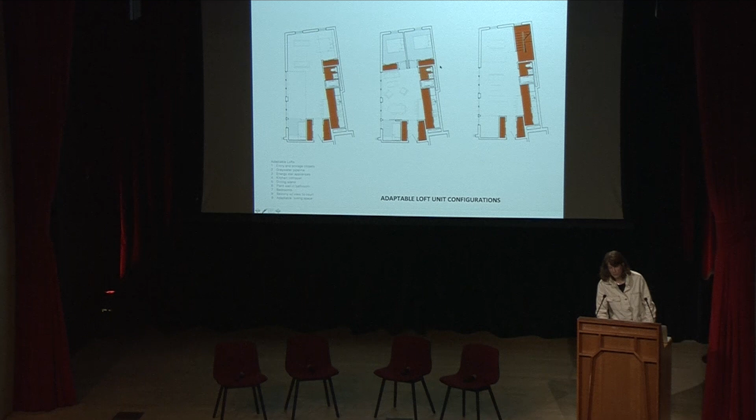So someone could have a small office, work at home office, cut down on commuting, or a small bedroom. You can have 3 bedrooms, or you can pop in a stair here and connect units. So this was sort of a technical project, but it was also very much an aesthetic project. How does that kind of use of wood, the plywood lining, how does that transform things? What about vintage reusing? This is a Walmart's table that they've actually just put a plywood top on.

And because this was a little bit more money than it would have been had we not used the forest certified materials, our developer did a very, I think, interesting thing with us, developing an app called the Chrysanthemum Building. And really what it is is an aggregator app that's sold to residents, and all the units are sold, as a kind of aftermarket way of recouping money. It's sort of a profit center for the developer.

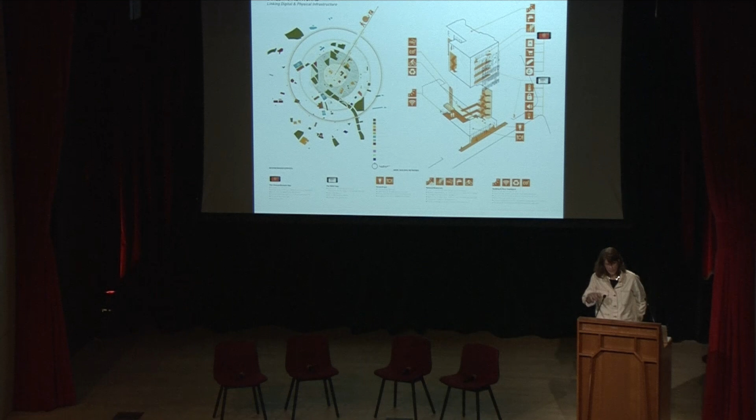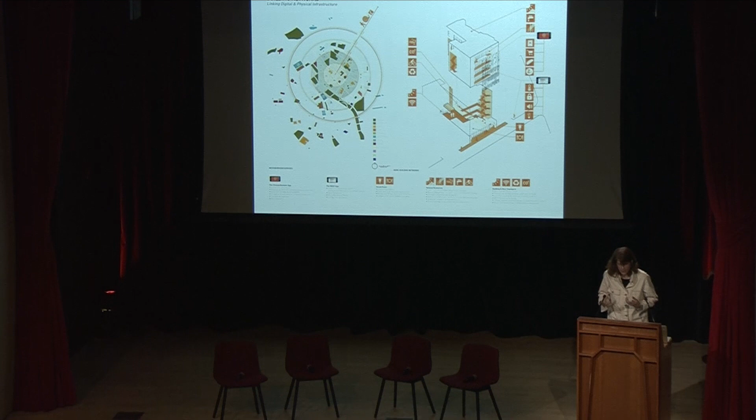And it just aggregates all of the different services that are in the walk zone, like, for example, slow food, farmers markets, the bus schedule, the dry cleaner, and so forth, and brings that all together as a service. And then it also performs composting services for the Boston residences, because the city of Boston doesn't provide that. It's not like San Francisco. So it's a way of kind of supplementing some of the building management services. That's the Chrysanthemum Building looking the other way.

The last project I want to talk about is, I'm also being, I think, quite provocative with it. It's called Plant Properties, which is supposed to be a little bit of a play on words. It's a joke. And this is a future urban development. It's also an ongoing experiment that I'm working on with my colleague, Michael Strano at MIT. He's a chemical engineer, I'm an architect, and we have a mixed team of students who've been working on this.

And we know that plants repair themselves. We know that they're amazingly efficient. There's nothing that we have on Earth that's as efficient at creating energy, at getting its own water, at responding to different chemical signals. I mean, plants are really a biological platform for technology. And so in a field that Michael's team is developing called plant nanobionics, he's looking at nanoscale particles as applied to the biology of plants. And we are experimenting with a process which allows plants to produce light.

So in this future, which is not so far distant from our present, plants would provide oxygen, they would help clean water, they would provide nutrition, and they would also produce light. The light is very dim. This is a spinach leaf, and you can barely kind of read the words. So this is a crazy, out there idea. And you might ask, well, why are we doing this? Do we not have anything better to do, more pressing?

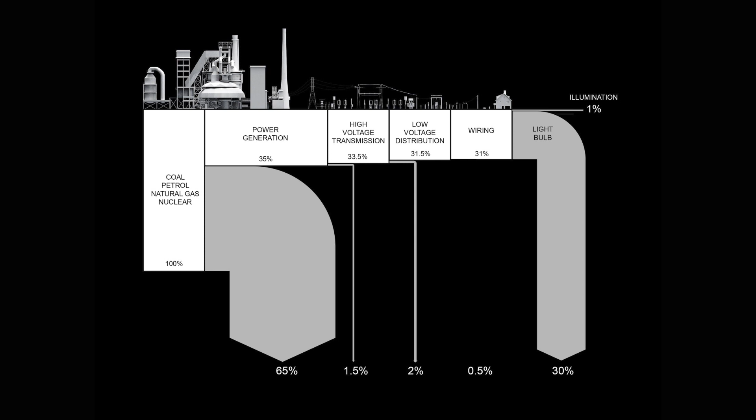But when you look at this Sankey graph, this is from Leon Glicksman, a venerable expert at MIT, it doesn't really matter where you start on the fuel side, right? You can pick your fuel of choice. By the time you get to the lighting in your home, there's been a tremendous amount of waste, like over 90% waste. So you're only getting a tiny, tiny bit of efficiency from that electric grid system. I think in housing, it's time that we move on from the electrical grid system altogether.

And it's not about a plant replacing your desk lamp. It's about the potential of a plant to not generate the footprint of anything that has to do with the electrical grid. No battery, no nothing. It's all natural resources. So actually, give credit to the Cooper Hewitt. They took on our project, which is quite a challenging experiment because it's introducing living plants, and it's an ongoing experiment that you can see in the museum.

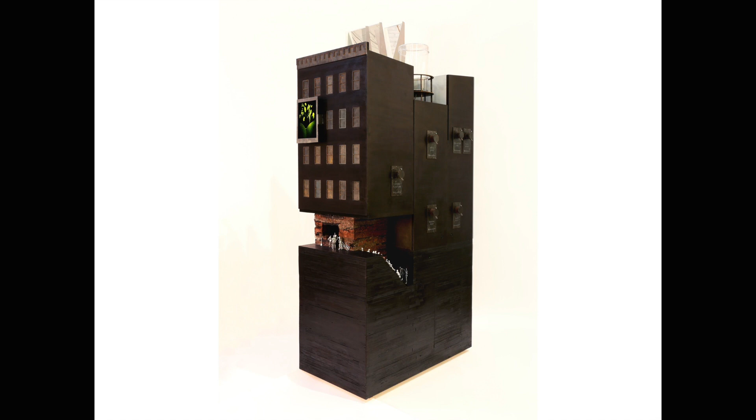It's always difficult to bring plants into a museum because plants have insects and plants have moisture and they have many things that are difficult for museum collections. But what we did is imagine a kind of a typical New York City tenement, and we designed a light harvesting system, which I'll talk about, a water distribution system. And you can go and take a look in some of these little peepholes. And when you look in those peepholes, you can also take a photo and upload it to Instagram at Plant Properties. Many people have done that.

But you can begin to understand what life might be like in this future when perhaps plants actually provide a domestic infrastructure. So for example, this is WaterShare. This is a way in which people and plants are sharing the same water. So bathrooms are much more luxurious. They're covered with plants.

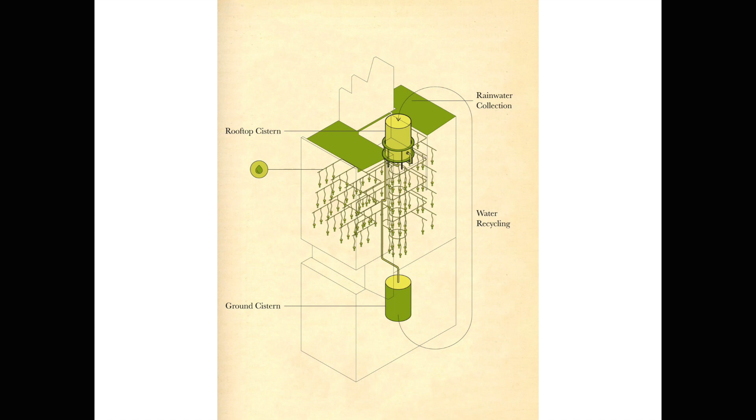The illumination is happening there. The water system that is providing a gravity-driven, right? This is not grow lights. This is not like a cannabis factory or an indoor farm, right? In this world that we're imagining, we're quite resource constrained. There might be some electricity, but there might not be a lot. So we're using all natural forces, gravity, sunlight, water, soil to grow these plants.

It's full of sunlight. And there are some people, and we're being very deliberate about having the people be completely abstract, right? You don't need to be an architect to know that that's not a real person inside there. But everything else is real. All the resources are real. The plants are real, their light is real, the sunlight is real, the water is real. And the light of the plant is scaled a little bit because the room is at scale.

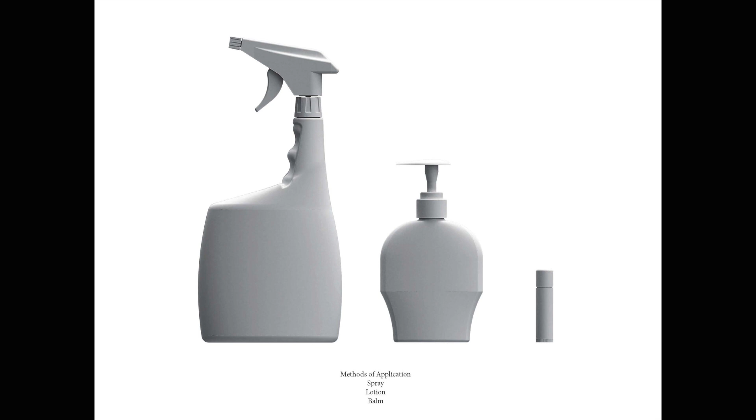And we're working now on changing the infusion method, thinking about things like sprays and lotions, so that this could be applied to larger structures and be repeated. The light could last longer and be brighter. Right now, it lasts in a matter of hours, but Michael's mathematical model suggests that this could last days and even weeks.

So I just want to sum up the strategies here that I'm just touching on. That there can be hybridization, right, with the soft house of distributed and centralized methods of production. You can have plywood that could come from a Finn Forest-like company, but you can also have Brettstapel that builds local labor in neighborhoods and regions. You can also hack existing systems of construction to resource them differently and to expand what they can do, as with the Chrysanthemum Building.

And you can also understand that the living biological technology that a plant is can offer us a wholly different way to think about domestic infrastructure in the future.